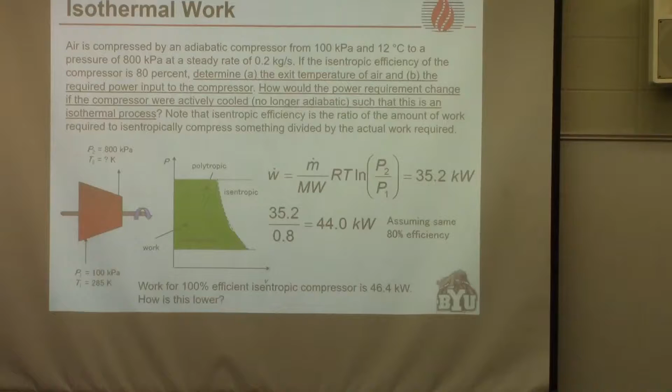Well, at least with the isentropic case, as you compress it, it's heating up, and so the gas is going to push more against the work you're doing. So if you do more work, then you compress it down.

Outstanding answer, right? So as you go through a compression, as you compress the gas, the temperature rises, which means each stage of the compressor has to compress more. Remember, we just said it's the volumetric flow that determines how much work you have to do. So as the temperature rises, the volume you have to compress is increasing and increasing.

And so it does more and more work as it does the compression. So why is it that there are essentially no isothermal compressors used in industry? Real gases don't compress without increasing temperature. Okay, but real gases will increase their temperature too. So over the pressure ratios that most compressors operate, you could use an ideal gas expression for the gas and you'd be fine. That's a good thought.

So real gases, we'll take a tangential question. Is a real gas going to be typically harder or easier to compress than an ideal gas? Depends on the gas, but almost always easier.

It turns out all gases have attractions to one another, right, gas molecules. Ideal gases don't have any. All real gases have some attraction to one another. That's why, remember, in the real gas equations, the correction that they put in there is always a negative correction.

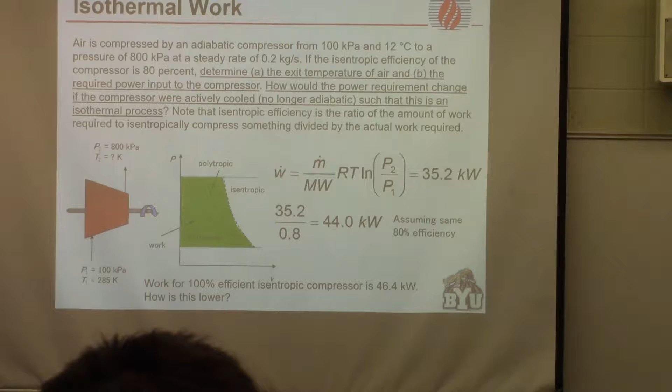So that's trying to get closer to isothermal. It's a bunch of little steps. It's not really flat, but in the limit of an infinite number of stages, you have an isothermal compressor.

You see a question? Well, I was going to ask if we could go back to the slide with all the efficiencies on it. For the last question, we were supposed to find the rate of consumption of fuel. I was wondering if you could point out what I did wrong. So W dot, I said was the horsepower. That's right. And then this is the heat of combustion, I threw in the BTU per gallon.

And the efficiency, and the M dot I was solving for was what I thought was the gas being consumed. Yeah, that is right, that should be what you got. You should have gotten gasoline consumption in gallons per second or something like that. So why do you think you did something wrong?

All right, so is everybody comfortable with all of that? So the important concepts here are for turbo machinery in general, compressors and turbines, the most common for gases, it's really the volumetric flow rate that you need to think about. So this would be a great conceptual question on an exam.

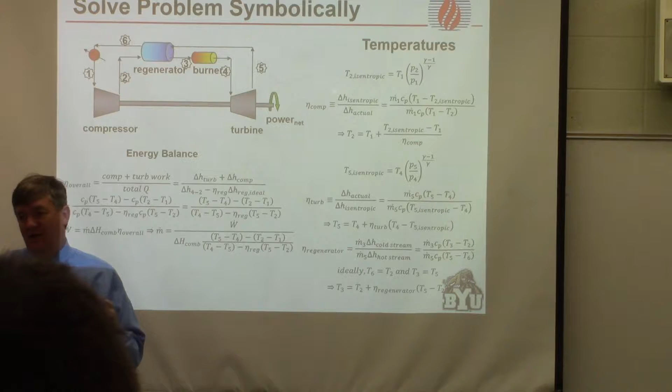If I were to compare argon and helium, which have a molecular weight different by about a factor of 10, and I put argon and helium through the same turbine, which one is going to generate the most work, assuming the pressure ratio is the same and assuming the volumetric flow rates are the same? Which one produces the most work?

They're the same, right? But which one has the highest mass flow rate? Argon has 10 times higher mass flow rate, but produces the same amount of work.

Then if we study hydroturbines, we'll come back to the mercury versus water turbines.

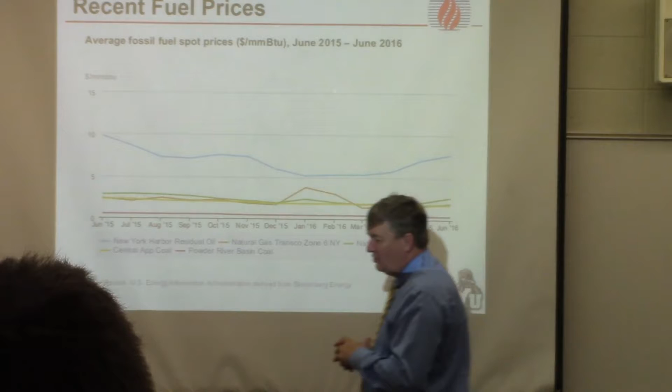Most of you are probably aware that in the United States we have closed, we are building some nuclear power plants, but we've closed more than we're building. We're shutting them down faster than we're building them, actually. Coal is also in decline, and most people blame global warming. Maybe you think that global warming is why coal is being decreased, and I'm not sure anybody knows why we're closing nuclear power plants. But what I want to point out to you is that in the future that could very well be the case.

So global warming may be a major reason that we shy away from coal in the future. But currently it's not. If there were no global warming and nobody were worried about it, we still would be closing coal-fired power plants. This slide shows you that both coal and nuclear would be closed down. The reason they're closing down right now is just 100% economic business decision. It's not because of any bias against coal or anything else.

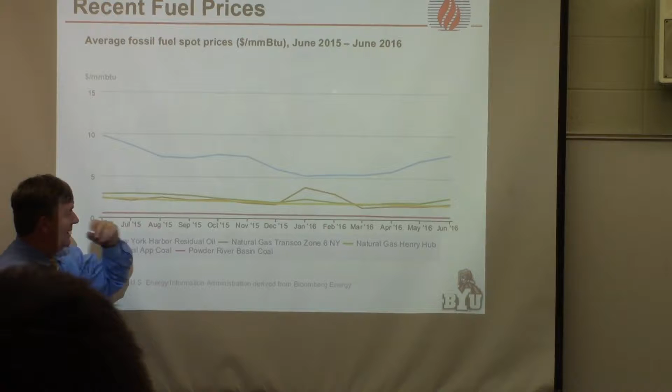This shows residual fuel oil that some people still use for power generation, and this is the cost, the dollars per million BTU, for a variety of different fuels: natural gas and coal, and oil, but ignore the oil right now. Natural gas used to cost more than coal, but a natural gas power plant is cheaper to build. So you would say, well, the power plant is cheaper, but the gas is more expensive. Most people opted for coal because over the long run, the coal was cheaper.

Coal comes in several varieties, we'll talk about that next week. But the kind of coal that we burn in the western United States is typified by Powder River Basin coal, which comes out of the state of Wyoming. Wyoming, by the way, supplies half of the coal that we consume in all of the United States. So that's really cheap coal.

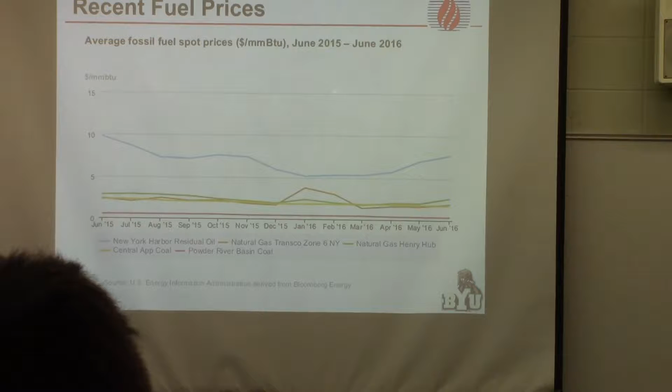It's easy to mine. At the mine, it costs about $3, sometimes a little less than $3 per ton. So think about that for a minute. A ton of dirt would cost significantly more than $3, right? So the idea that you can buy a ton of anything for $3 is a pretty astoundingly low price. And of course, if you buy it 100 pounds at a time, it doesn't cost $3 a ton. But when you buy it many tens of thousands of tons at a time, at the mine, it costs $3 a ton. By the time it gets to the power plant, you have to pay to rail it there, and it's up to $19 or $20 a ton.

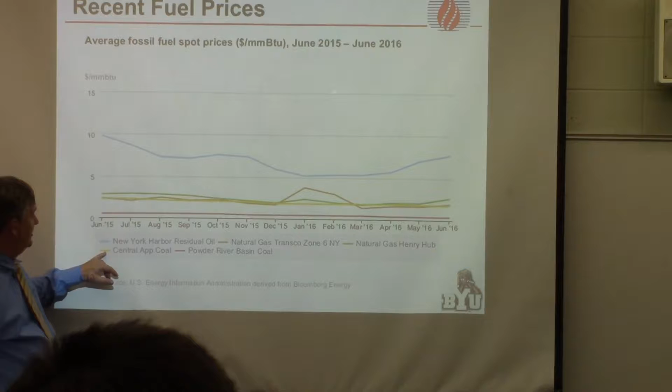So that's really, really cheap coal, and it's still the cheapest source of energy that we have. You can see that one here. But the coals that we mine in the eastern United States, the Central Appalachian coals, are this yellow line, and they're considerably more expensive. The Wyoming coals are typically open pit mined. There may be 30 to 70 feet of dirt you have to scrape off the top, and then you just load up coal in the biggest buckets that they can build and put on things, and they're big.

They have one big scoop that will just scoop up 25 tons of coal at a time, and they dump it in the back of one truck that can carry 25 tons of coal at a time. Or sometimes they just put a drag line that just transports it right out of there. One person picks up 25 tons of coal and does that every 3 or 4 minutes, just pulling it out of the mine. So that's really cheap to mine that way.

By contrast, there are underground mines, which we have in Utah and in most of the eastern United States. So now you have to dig way underground and have a relatively thin coal seam by comparison. And you have to prop up the mountain on top of you as you're digging through this coal seam.

And you're dealing with a bunch of labor unions that increase costs significantly, so that's way more expensive coal to mine. You can see where, that's why it's up here in terms of, it actually has more energy per unit mass than the coal we mine from Wyoming, but it's way more expensive to mine. And recently, these are all recent prices, natural gas is as cheap, or in some cases cheaper, than at least the eastern coals.

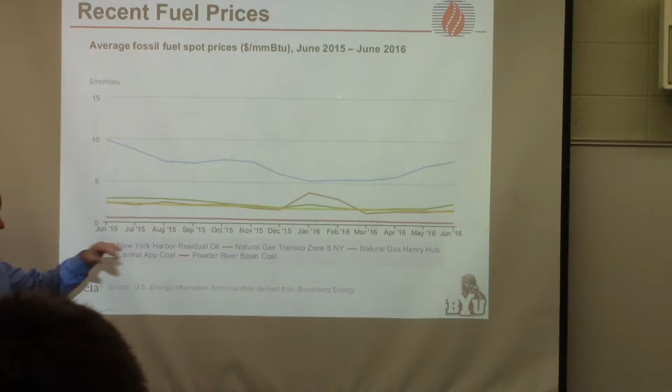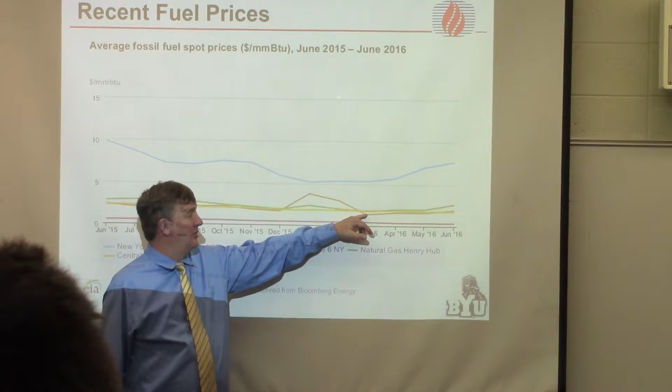So when you're in that condition, this is less polluting, the power plant is cheaper and faster to build, it responds more rapidly to changes on the grid. There's actually no reason other than cost. Cost used to be the only reason you used to burn coal. This used to be 10 times higher, so this was up to here, but now it's down here so low that people say, why would anybody build a coal plant, especially one that burns eastern coal?

And that's the reason the coal mines are being shut down. Nuclear plants cost even more than coal, so the fuel for the nuclear plant is close to zero cost, but the levelized cost is even higher than a coal-fired power plant. That's the reason nuclear plants are so hard to get people excited about right now: you can generate the same amount of energy at a much lower cost, with a simpler and cheaper plant, tying up a lot less capital, if you do it with natural gas.

Now, looking to the future, that could all change, and things like global warming and other factors can change it.

So Greg talked about, and I'll review a few parts of this, how you produce natural gas in some of the properties. He didn't talk too much about how you use natural gas, so I wanted to talk about that.

Natural gas is used primarily in two different ways. What we call a simple cycle turbine, or some people just call this a combustion turbine. This is a typical example of one for power generation. They have a big air inlet on the front, and they don't show it, but there's a bunch of filters here.

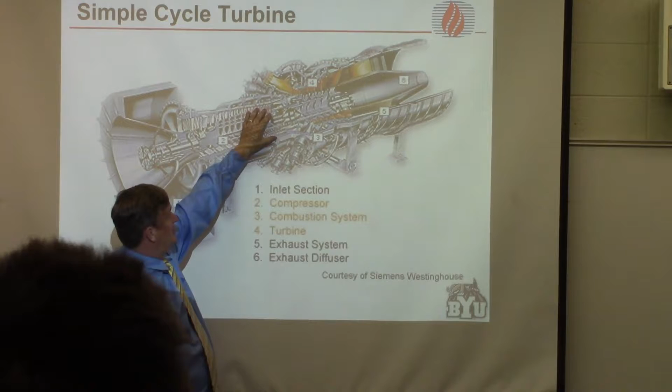They want to get the air as dry and as clean as it can be, get all the particles out of it. So right up front there's a bunch of big air filters and some dryers to dry it out a little bit. Then they pull the air through the compressor, and just like we talked about so far, the compressor comes through here, and then they have these combustion cans all the way around here. We'll see an actual picture of them in just a minute.

So the air at this point is compressed. It goes through these combustion cans, and it burns, and then it goes through the turbine, and it expands, it comes out the back end of the turbine. But it leaves the turbine still at a pretty high temperature. The pressure has already dropped to atmospheric pressure, so you can't expand it anymore to cool it down, but the temperature is still pretty high.

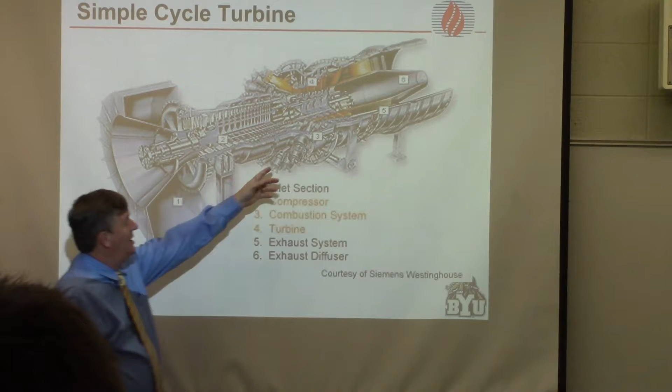So what would be the obvious thing to do to get more energy out of the system? Heat exchange the exhaust. If I set up a heat exchanger back here, and use this high temperature gas to boil water, for example, to make steam, and then drive a steam turbine with that steam, then first of all, what's this cycle called? Do you remember the names of the cycles? Brayton cycle. This is called the Brayton cycle, the gas turbine cycle, the compression.

And this one we haven't talked about yet, but the steam cycle is called the Rankine cycle. I think that might be the only one you studied in thermodynamics class. Does that sound familiar, the Rankine steam cycle? So we come out of the back end of the gas turbine here, and then we build another cycle, the Rankine cycle, where we heat up steam, superheat the steam actually. Steam goes through a steam turbine and it recirculates here. We use the high temperature from the exhaust of the gas here to drive the steam turbine.

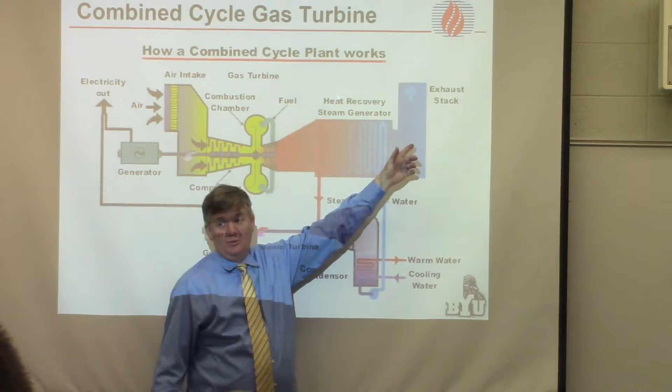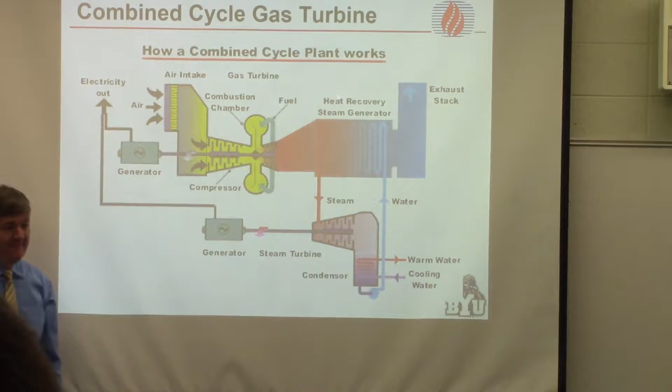And then the air that came through the combustor is back down to room temperature, and we've extracted just about all the energy we can from it. That's called a combined cycle plant—combined cycle meaning a Brayton cycle plus a Rankine cycle.

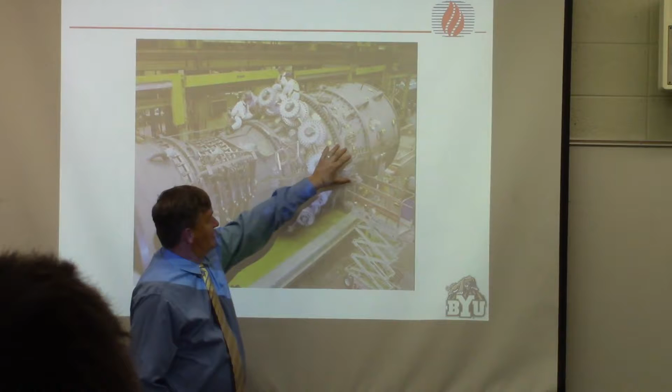This is the front end of that. This is GE's frame H-class gas turbine, shown with people for scale. These are the little combustion cans where the combustion happens, this is the compressor, and this is the turbine expansion system on the back end.

The turn down ratio is an important number to think about—what's the ratio between the maximum power we can produce and the minimum power we can produce that's not zero, where we're still operating reliably and sustainably. You get about a factor of 3 on the turn down ratio for the simple cycle plant.

The startup time for this simple cycle plant is about 23 minutes from a cold start. But if it's in a peaking mode where you're just following the load, it takes about 12 minutes to change the load—you can go from 30% to 100% output in about 12 minutes. That's quite fast and a really important parameter.

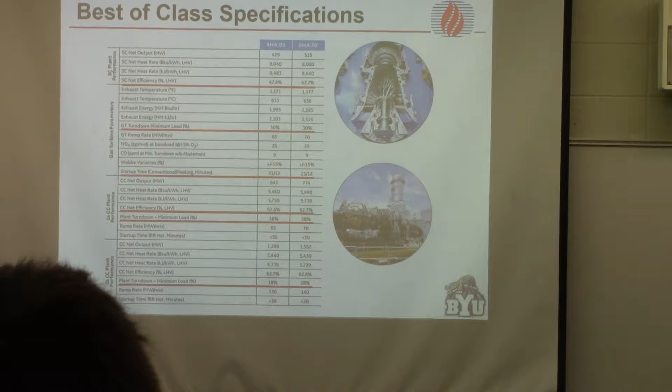So that's the way we use these technologies. A bunch of this is what Greg talked about last time.

This is significant—natural gas is becoming a larger and larger fraction of our total fuel use, especially natural gas production. This is conventional natural gas production, which is actually a small fraction of what we produce now. This is the shale gas and tight gas we talked about last time, and they're dominating production and will for the foreseeable future.

Has that prediction changed since the price of oil fell? The most recent numbers are the prediction.

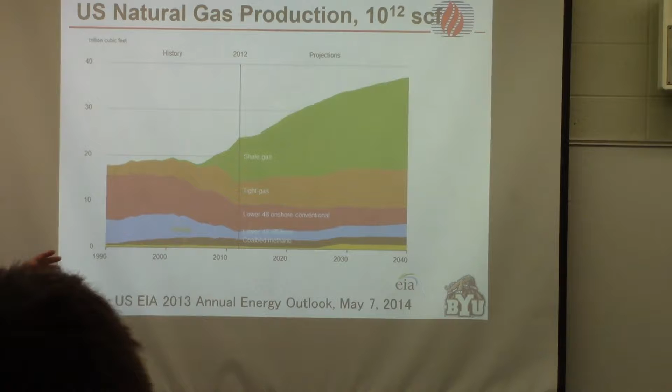Probably, I don't know, I don't think it has. I actually had the more recent data on the first day of class that we went through, and it's on there. I don't think it's changed appreciably.

But you can see how the production has increased. Greg mentioned that people have been fracking for generations, fracking natural gas wells forever, but they haven't been fracking them as efficiently, particularly in shale, to produce oil, liquid oils like they have in the past.

So there's some kind of new fracking technology where they... we got some slides on what fracking is here, and we'll talk about it in just a minute, but that's what's mainly responsible for this big surge in natural gas.

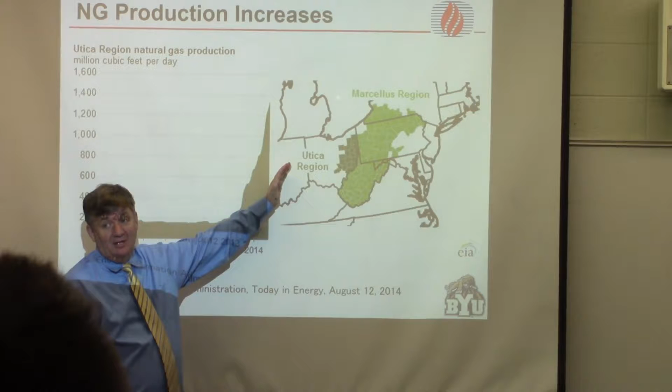And really what's responsible for it is that people are going into the shale deposits, fracking the shale deposits. Mostly they want to get the natural gas liquids out, which are the propane, butane, and heavier materials in the natural gas. Those are the valuable things. That's where they make all their money.

Most of these places are at best breaking even, or probably losing money on the natural gas itself. But natural gas liquids have been valuable. Not as valuable now as they used to be.

Just to give an idea of how valuable they used to be: I think today oil is $44 a barrel or something like that. It was over $100 a barrel just a year and a half ago. So that difference from 44 to 100 would all have been profit when they were doing this.

So that's why there was such a big surge. But people are still operating. We haven't appreciably decreased, even in the most recent data - the amount of natural gas we're producing hasn't appreciably decreased. The profits have decreased dramatically.

So, you talked about how gas wells decay very quickly. Is there like a peak gas, or are we ever going to use it all up? So that's a good question.

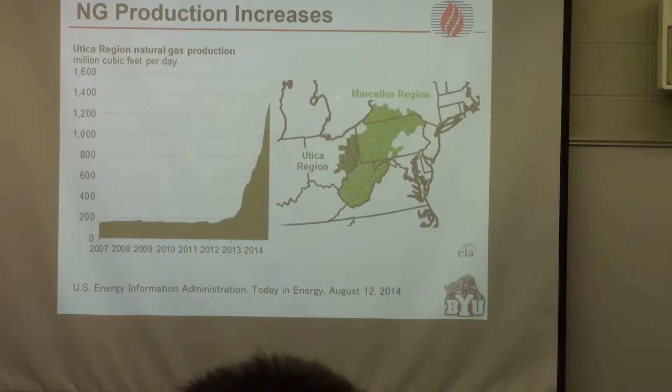Now that they're extracting all this gas out of shale, most people think - there was just an announcement in the news, I don't read the news all the time, but I did when I was in undergraduate school - they just announced a major new shale find in West Texas that increases our total reserves in the United States by 15%. Huge new shale play, and one company announced that they bought the property.

You never know if it's to their advantage to get a bunch of people who are really excited and buy stock. Sometimes these things are a little overblown when they get announced, but nevertheless, we're finding a lot of shale, and there's every reason to believe there's a huge amount left.

So clearly all fossil fuels have a finite life, but with respect to coal, natural gas, and oil, we will probably stop using them for reasons other than running out of the resource. That may be true now with petroleum, since we're doing fracking as well, but certainly wasn't the case in the past - there was genuine concern we were going to run out of petroleum before we found another technology.

So this is in the Utica region - this is where they're producing natural gas. This is the region where, if you saw, you can go on YouTube and see people lighting their tap water - they put a match next to it and it catches on fire.

So the EPA has never been able to reproduce those results, but they're still widely cited.

So this is the Marcellus region - similar kind of big surge in natural gas production. Greg went through most of this.

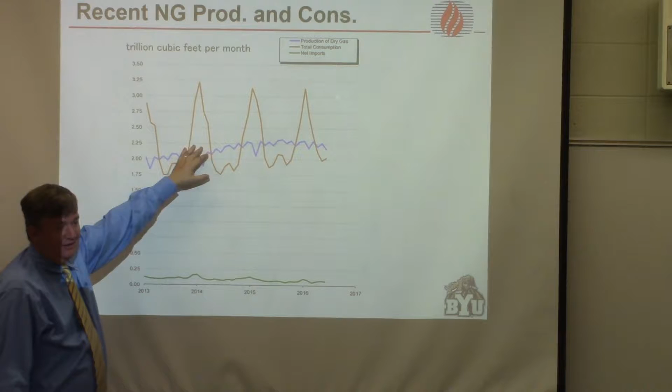I did get the most recent data I could find, and you can see natural gas production has leveled off, but it's not declining like you would expect it might. It might start to decline, and arguably it is just barely starting to decline here. It's hard to know, but it's not.

So far, the low costs have not driven a bunch of people out of business, although money is definitely tight. So we talked about the composition - mostly methane, but it has a bunch of other things in it.

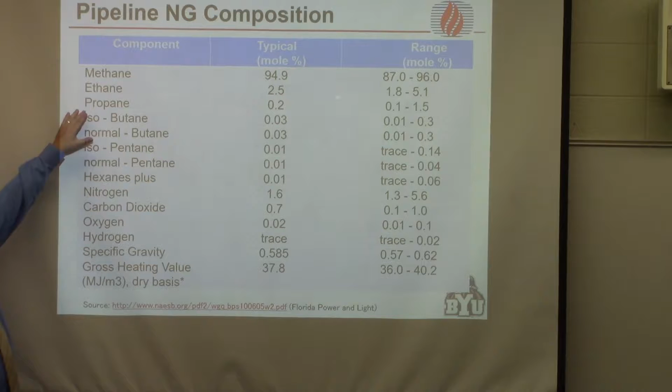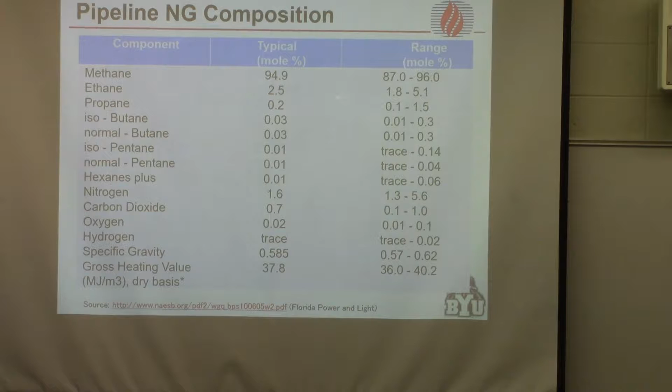What Greg didn't talk about too much is the pipeline specifications. This is not natural gas as it comes out of the ground. What he spent most of his previous career doing was turning this into something meeting pipeline specs: get the CO2 content down to less than 2% typically, get rid of inerts like nitrogen, and there should be virtually no oxygen, no sulfur compounds. They extract almost all of the heavier components, the ethane is debatable whether they put that into natural gas or not, but everything else is way more valuable as a liquid transportation fuel than it is as a gas fuel. They don't want it to condense anyway.

So there is also liquefied natural gas, and this is just asking to be confused. There's LNG, liquefied natural gas, and NGL, natural gas liquids. They're both liquids and they both come from natural gas, but LNG is methane that's been liquefied so you can ship it long distances. NGL is things heavier than methane, either ethane and everything heavier or everything heavier than ethane, which you extract from natural gas and eventually ends up in somebody's gas tank somewhere. So these are C2 or 3 plus, and this is just regular natural gas.

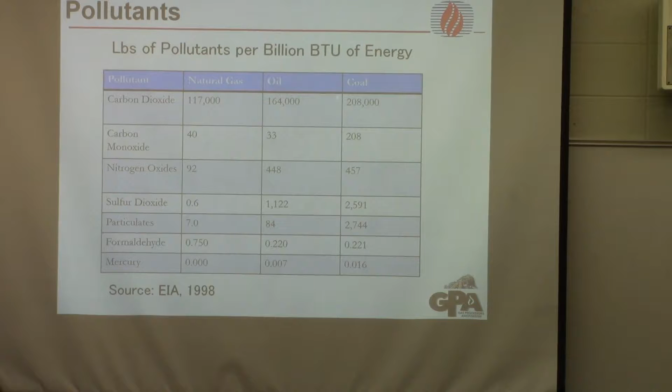The specifications for LNG are richer in methane than the specifications for natural gas, and in particular they're much lower in pollutants. They'll tolerate up to 2% CO2 in natural gas in pipelines, but for liquefied natural gas, the CO2 content specification is 50 parts per million. It turns out CO2 is really difficult to remove — that's the most difficult step of processing natural gas, because CO2 and ethane form an azeotrope, and it's hard to get the CO2 out and leave the ethane in with most processes. So we went through the pollutants.

For natural gas to get the price up, what's going to be the big factor? Is it going to be a decrease in our reserves, or an increase in demand? What's going to bring the natural gas price up? People who answer that question mostly sit in tall office buildings in big cities and get paid huge amounts of money. The honest answer is they don't know the answer to it any better than you and I do.

But here are some considerations. We are shifting quite significantly toward natural gas for power production, which is a large consumption of natural gas. Because the cost of oil is low, the profit margins for natural gas are really low. So it's a very logical conclusion that several natural gas suppliers are going to go out of business because they can't continue. Many have been operating at a loss for a while — companies operate at a loss fairly frequently, because it's many times cheaper to operate at a loss than to actually close down. Airlines do this all the time: they go a year without making a profit, then the next year make an unbelievable profit. Over time they do all right, but in any given instant companies may be operating at a loss. Several natural gas companies right now are probably operating at a loss.

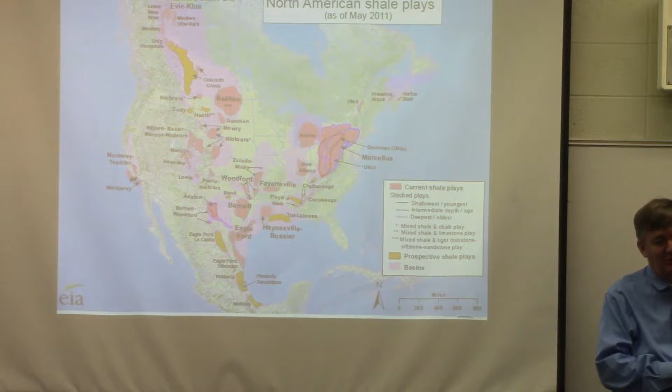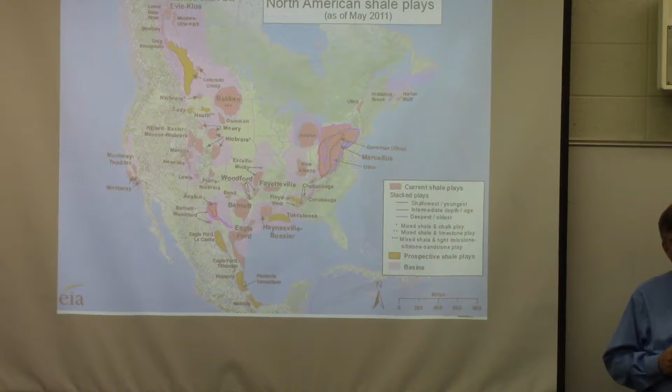So if energy prices stay where they are — remember the slide we saw on the first day, they're actually still higher than the historical average, just low compared to relatively recent history — if they stay where they are, and there's a lot of reason to believe they will, then probably several companies will go out of business. Demand is increasing, but supply will decrease, and that will drive the price up. But people have been predicting that for a long time. One sure way to embarrass yourself is to try to predict anything about what's going to happen in any aspect of energy more than a year ahead of time.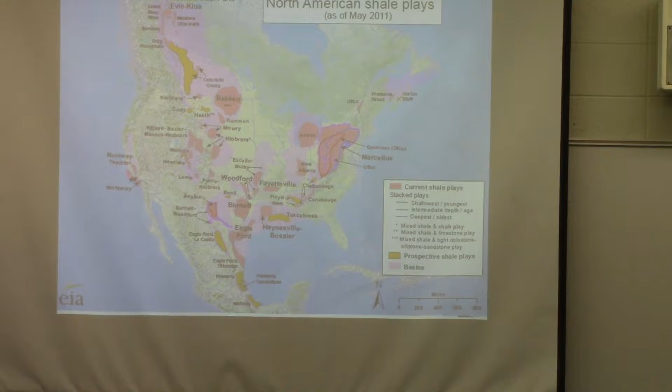So these are where the natural gas shale plays are, where we're getting most of our natural gas right now. This new Alpine one is right in this spot. But you can see there's natural gas in a lot of parts of the United States. Let's talk about how you produce it.

This might be interesting to you.

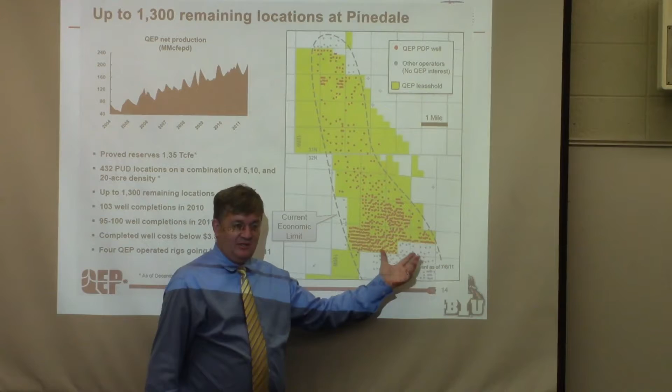So this is actually in Wyoming near Pinedale, but in the Uinta Basin, and I have that slide in here as well. This is just a map of natural gas wells, and this is 1 mile by 1 mile. Look at the number of wells there. You could relatively easily walk around that, look at the density of wells they have in natural gas plays. There's lots and lots of natural gas plays, and the Uinta Basin looks even more dense than that in terms of how many natural gas wells have been drilled.

Wouldn't it be more efficient to frack those wells instead of putting them that close to each other? So they do still frack them - directional drilling, horizontal drilling. They're doing that more and more, and that's increasing fairly significantly, but it is still expensive.

The directional drilling costs quite a bit more than others, but in shale plays in particular - these aren't traditional natural gas deposits - shale plays, they almost always frack it. So let's see what fracking is.

With a normal oil rig or whatever, it has the arm that pumps up and down. Is that the same for a natural gas well? No, these are gases, so they'll usually come out of the ground - you try to control the pressure down, so you almost never have to pump them out. You pump them across the ground, compress it, pump it into pipelines on the ground, but getting it out of the ground is not one of the problems.

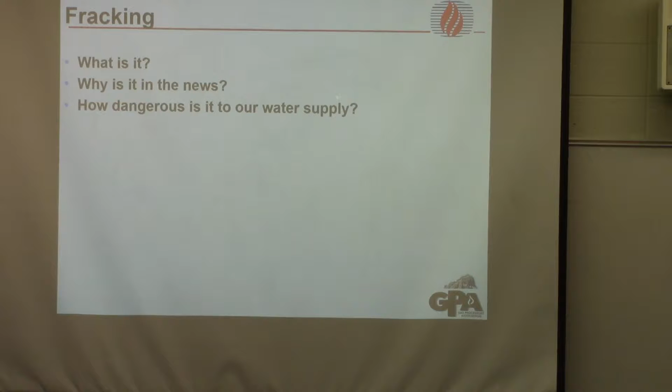Because think about it, the pressure in the reservoir is basically the pressure the water would be at that depth, and natural gas wells are approximately the same depth as oil wells, about a mile underground. So there's a lot of pressure, and the weight of the gas in the pipe is small. So once you get in there and it starts producing natural gas, it's not hard to get back out.

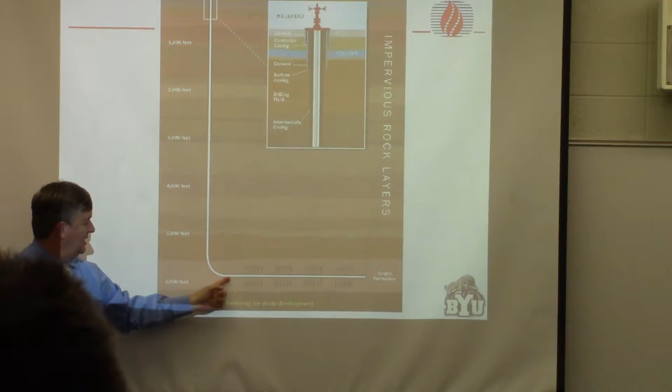So fracking - let's talk about what fracking is. As always, these are never to scale. So this is a mile, and this is 2 feet this way. You come and drill down here, and they don't turn this rapidly either - they come down in kind of a long, gentle sweep. But eventually you can get these wells to be horizontal.

This is shale, for example, some formation you're trying to produce. You drill through here, initially just drilling until you're at the end of the formation, or until you're to the point where you're going to extract the rest of it from another well and from another direction. Once you've completed the well, you send a little device down here that explodes and perforates the pipe that you put in here, and then you pressurize.

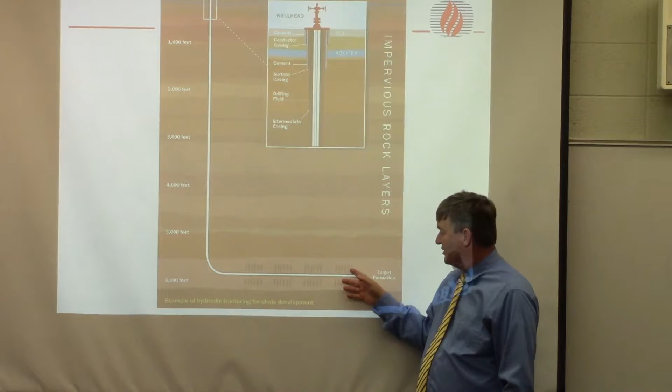You do this one at a time, not all at the same time. And then sand - traditionally it's been water with sand in it. The sand is coated with what they call proppant, which is usually sand that's been coated with hydrocarbons or other things to make it easier to pump, because sand has sharp edges and makes it abrasive when you pump it through. If you make it more spherical and round, it's a lot easier to pump, and it helps with both its strength and its resistance to the materials it's going to encounter down there.

So you pump this slurry of sand and water into the formation at very high pressure, and it fractures it. Think of this as sandstone with a bunch of gas and oil trapped in it, and you fracture the formation. They've been doing this for a long time, but in the past what they've done is just fracture it and then pull the gas out. If all you're doing is pulling gas out, that works fairly effectively.

But if you're trying to get the liquids out as well, as soon as you let the pressure off of it, all those rocks kind of settle back into where they were before, and they seal themselves up again, and you can't get the liquids out very effectively.

So the new thing in fracking is these proppants that you put into the liquid - they get into wedges between all of these rocks, and you pull the liquid out, but the little sand particles stay there, so now the rocks can't collapse back into their original formation. Now you have this big fractured formation, and you can pull out gas and the liquids. At the temperatures that exist down here, these are all usually supercritical or liquid or gas-like substances, but you're pulling them out at a relatively high temperature and producing the natural gas.

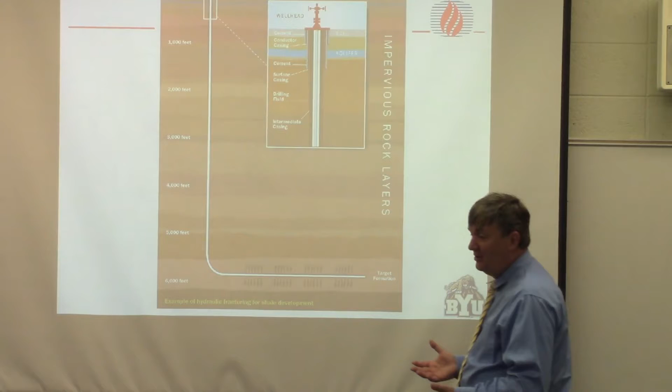So we used to recover maybe 15, at best 20% of the hydrocarbons from a formation like this. Actually, if it was tight sandstone like shale, probably more like 3 to 5%. And now people are getting recoveries up into the 60% range of these same materials. So materials that used to be wells that people drilled a long time ago and decided were dry are now potentially useful again for extracting hydrocarbons, and you can much more effectively extract these things.

So once you finish this one and you seal this off, you do the same thing, and you just keep marching back here until the whole formation is fractured and you produce the whole formation.

So the very most recent thing that people are doing is using carbon dioxide instead of water with the proppants to do the same thing. Carbon dioxide has the advantage that almost all of the hydrocarbons will absorb it. So the carbon dioxide dissolves in the oil and makes it less viscous, so it flows out of the formation easier than if you use water to do the fracking.

I don't know if everybody's going to start doing that or not, but a number of people have done that successfully in the recent past.

You're saying you use carbon dioxide instead, wouldn't it be a lot different, because carbon dioxide is a gas versus a liquid? How does that work?

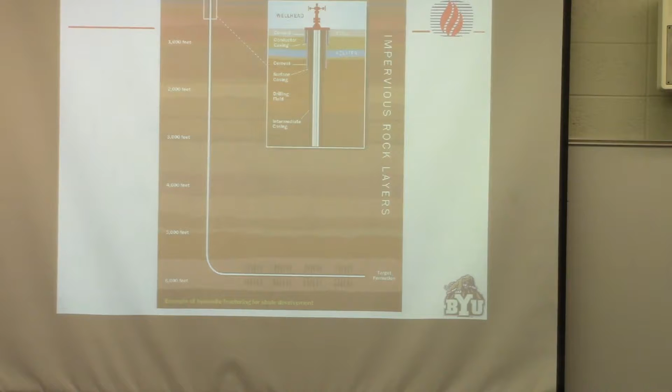So the pressure of the formation is typically 200 to 400 bar. And then when they're doing the fracturing, you're up to 600, maybe 700 bar. So it's condensed, really dense. At those pressures, depending on the temperature of the formation, CO2 will actually be more dense than water, even though it's still technically a gas or a supercritical fluid.

Will that also help you save on separation costs, getting the water out? Yeah, and so when you pull it back out again, the CO2... well, it saves and not saves.

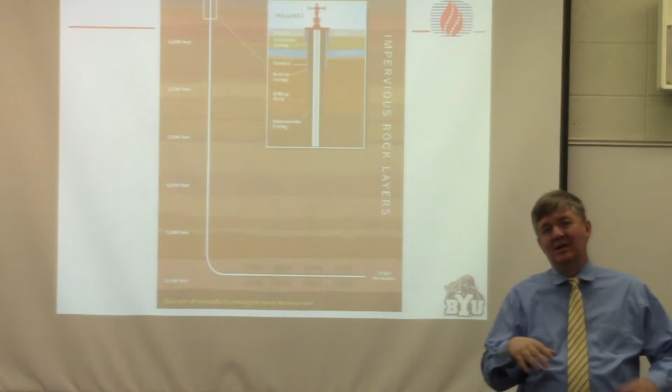So people are increasingly going to be required to make sure they recover all of the CO2. They want to anyway, because the CO2 is pretty expensive. To buy CO2 for an operation like this typically costs $80 a ton. I'll put that in perspective: remember, coal and oil was $3 a ton.

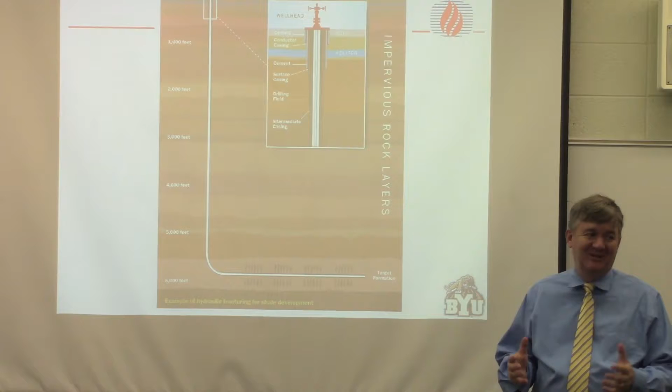So you don't want to just vent it into the atmosphere, but because of climate change issues, they don't want to vent it either. So that's the fracking operation.

Amine treating removes CO2. Then you dry it back out again, remove whatever mercury there is. This just goes through some typically aluminum-based mole sieves, or activated carbon. Then you try to get rid of the nitrogen.

This is where you start going through a cryogenic process, and then you recover the natural gas liquids. So this is where you cool it down to maybe negative 120 to 140 Celsius, and condense all of the natural gas liquids you can. You sell those.

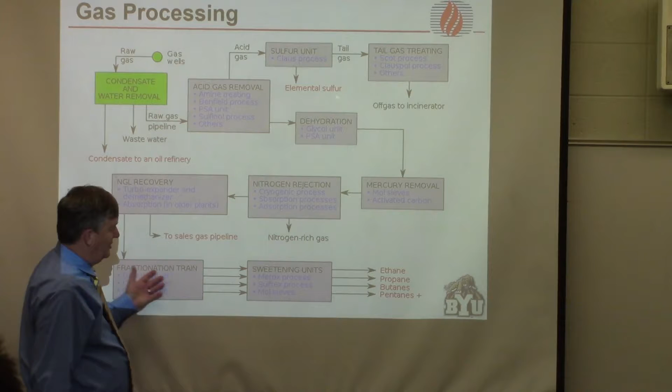The liquids come out down here. This is where the natural gas goes, out to the pipeline, and then the liquids you sell to a power plant or to a refinery, and they refine them. So that's a classical chemical engineering kind of process.

So you did some homework about the critical point, and I don't think we talked about the cricondenbar, but this is a little counterintuitive. For a pure substance, this doesn't ever happen: the critical point on a pure substance is always at the maximum temperature and pressure at which you can get two phases. So there's no part of this curve above that point—it kind of comes up and goes back like this.

But for mixtures of substances, you can, and almost always do in the case of natural gas, get to a point where you can have a gas and you can decrease the pressure of the gas and form a liquid.

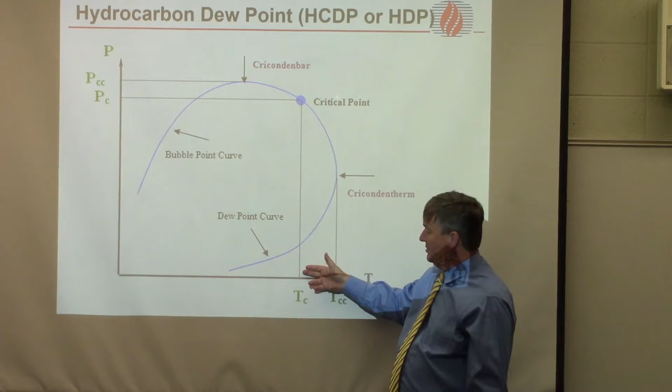As long as the temperature stays constant, usually if you decrease the pressure, you think you're going to create more gas. If you have a liquid, you would vaporize it. But in this case, as you decrease the pressure, it might form a liquid, and then you continue decreasing the pressure, and it goes back to all gas again. So there's a lot of things where your intuition about thermodynamics, when it meets the real world, turns out to be wrong. You find out, I thought I understood thermo, and now I don't. This is maybe one of them.

Another example is the CO2 content you get in exhaust gases. You would think that if you have a mixture of, say, 15% CO2 and 85% nitrogen, there ought to be some temperature or pressure where you can turn that CO2 into a liquid, because everything can be turned into a liquid, gas, or solid at some pressure. But with mixtures, that's not necessarily the case. So in those mixtures, there is no pressure or temperature at which the CO2 will be liquid. It's going to be a solid or a gas. You can't turn it into a liquid. The real world brings you a lot of thermodynamics that aren't so obvious.

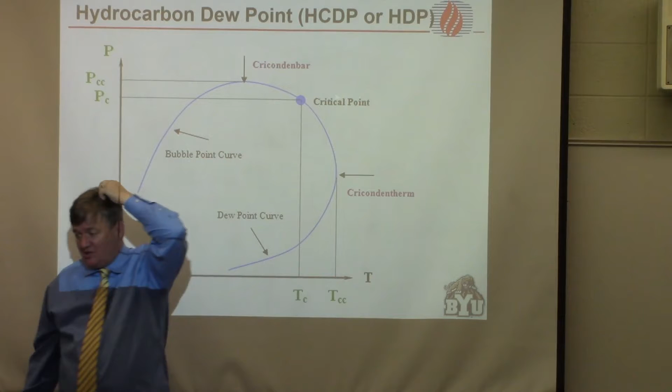The reason this is such a big issue is that it's one of the important specifications for natural gas. If you pump natural gas into a pipeline, pipelines go up and down over mountain ranges and travel long distances. So if you start off here but go up a mountain, the pressure starts to drop because of the rise, and then you start condensing liquids. This is a long pipeline, maybe 80 to 100 bar pressure, and it might be a couple hundred miles long. So this liquid starts forming in the pipeline, and of course it's going to run downhill and pool in places, building up to the point where it can actually plug off the pipeline. Then you start getting slugs of liquid going through your pipeline, and a slug of liquid arriving at a processing plant that's expecting gas can do a lot of damage.

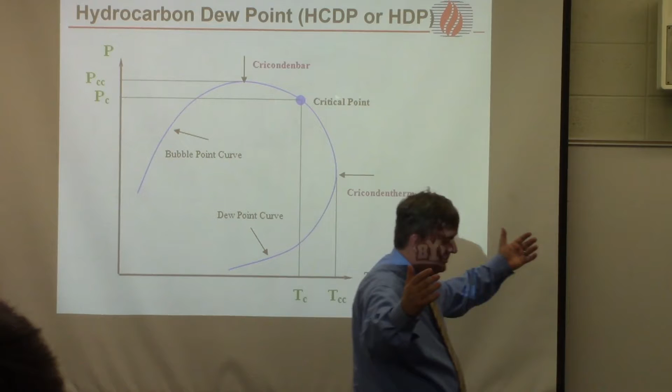There probably isn't anything in our country as potentially dangerous as the interstate natural gas pipeline. Think about this: the pipeline might be, typically, 2 or 3 feet in diameter, as much as 5 feet. They run at 100 to 125 bar pressure and go for 125 miles. If you were a terrorist, for example, and found where one of those went through a major city, and you blow it up, you've got 125 miles of 100 atmosphere combustible gas feeding that flame. That is a very serious safety issue.

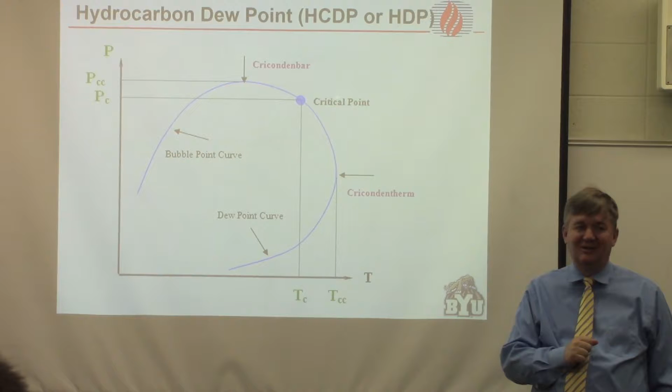Just like everything that stretches over hundreds of miles, it's almost impossible to constantly monitor what's going on. There are gas lines that go under scout camps and other places where people are always present. So for that reason, they put shut-off valves frequently in these pipelines so you can stop the gas flow if there's a major disruption. But compressed gases, even if they're not combustible, are very dangerous, and when they're combustible compressed gases, they're much more dangerous.

Other questions? Yeah, I was just going to say, it would seem like it'd be pretty easy to just have a couple points in your pipe where you put a liquid collection spot. Do they do anything like that?

So they do have places where they collect liquids, but it's not pooling up in one place, it's going to be coating the surface everywhere, and it's potentially corrosive. They make these little devices called pigs that they send down the pipelines, and they're pretty cool actually. Some pipelines are big enough that they actually have a place where a person could ride the pig through the pipeline. Basically it's just a little inspection device that fills up about the entire pipeline and goes scuttling down it, taking pictures to see if the walls are cracking anywhere, if they're corrosive, or if there are places where things have been pooling.

And they'll inspect the pipelines like that every couple of years or so, just for that reason. But they would much rather, and this is typical of industry, just not deal with liquids. So they're just never going to put anything in this pipeline that's going to form liquid. It's a way better solution than trying to go patch the problems when they occur.

So you hear a lot about oil pipelines and how the potential of them leaking gets people freaking out. Do people freak out about natural gas pipelines? They should, they're way more dangerous. Well, the one thing about natural gas is when it does leak, it all goes up in the atmosphere. So it's not quite the environmental hazard that people think of with oil. It's not the water hazard that oil is, for example. But it's a much bigger safety hazard.

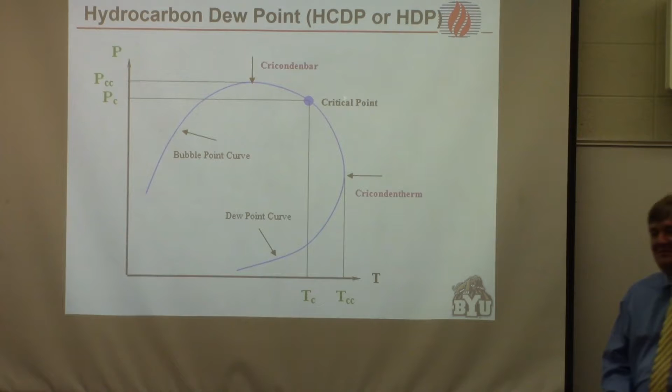Just the potential energy stored in that gas is much higher than an oil leak. An oil leak isn't going to blow. 100 atmosphere pressure would blow the building to rubble if it erupted underneath us. A 100 atmosphere liquid would be a relatively minor incident in the room by comparison. At 100 bar pressure, there's probably easily more than 1,000 times the energy in the gas, just in terms of PV work. That's a good thing to remember.

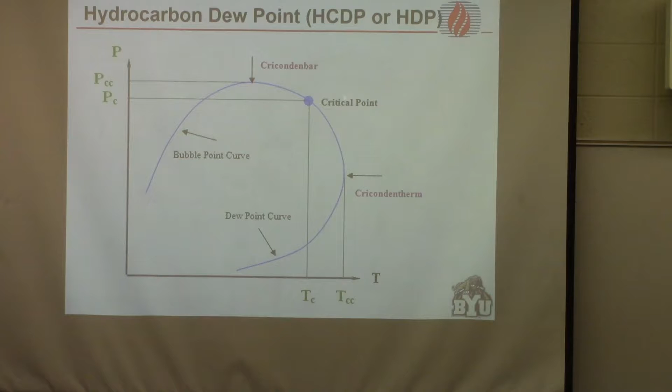Other questions? How about some of those gas lines failing sometimes in the US? Yeah, they do fail for reasons like we're talking about, or just structural reasons. Everything fails at some point. But a catastrophic failure like an explosion is hard to manage. Normally they will fail by some flange starting to leak, and they'll be able to detect the leak and shut it down, or something out of a pumping station will fail.

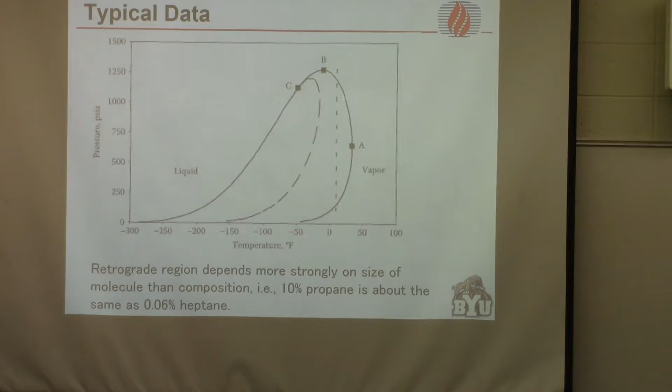So let's see, they call that retrograde condensation. This would be great if you're going to work in the energy industry, you can use something like this. The existence of this retrograde region is strongly dependent on the size of the molecule, not so much on the composition. So about 10% propane in methane produces a retrograde region that's about the same size as 0.06% heptane in methane. A little bit of a big molecule will produce a big retrograde region. A relatively larger amount of a smaller molecule produces the same region. So just think it's not how much C2 and heavier you have, so much as what the molecular size is.

But let me point out that most people say we want to manage this. Turns out this number is completely arbitrary, but there's a goal that most of the world is set up around: we don't want the temperature of the Earth to change by more than 2 degrees. It's already changed by almost 1 degree. To get to the 2-degree goal, that's going to require a global reduction in CO2 emissions of about 60 to 70% compared to 2005 levels of production. In the U.S. they're not that different than they are now. Globally, they're higher now than they were then.

So reducing CO2 emissions by 60 to 70%. All of electrical power production combined accounts for about 33% of total CO2. So we would have to reduce all of electrical power emissions to zero CO2 emission to be about halfway to managing the temperature to 2 degrees. Converting power plants from coal to natural gas is a move in the right direction, but it's not a solution to this problem. These large stationary sources of CO2 are going to be much easier to control than small distributed things like residences, and much easier than mobile sources like automobiles and airplanes. So the real goal, if you're really serious about climate change, is to find a way to get CO2 emissions to zero, not just reduce it by 50%.

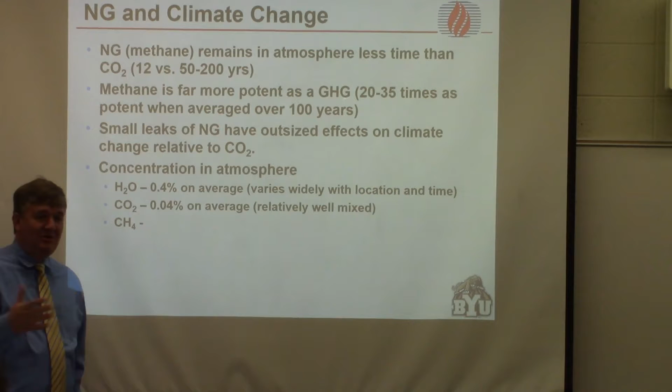The second approach was to just go measure the methane content in the atmosphere and compare it where people are doing natural gas processing to where they're not. So you have a baseline in terms of the natural methane content, and then the methane content where they're doing the processing. This gives a much, much larger number in terms of the amount of methane getting into the atmosphere. Since then, people have been redoing the studies, and it seems like the second study is more significant.

So let me just talk briefly about the greenhouse effect, and then we'll take a break. This is the essence of the climate change issue.

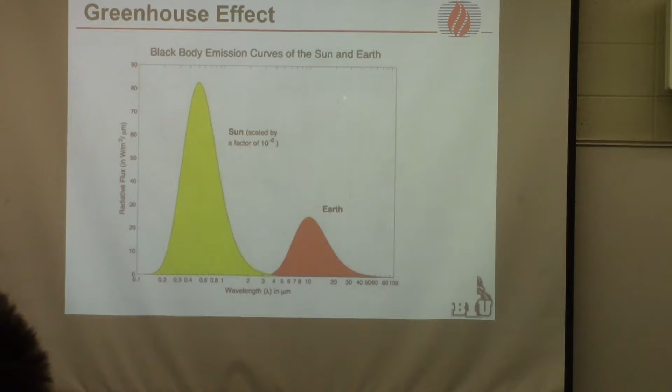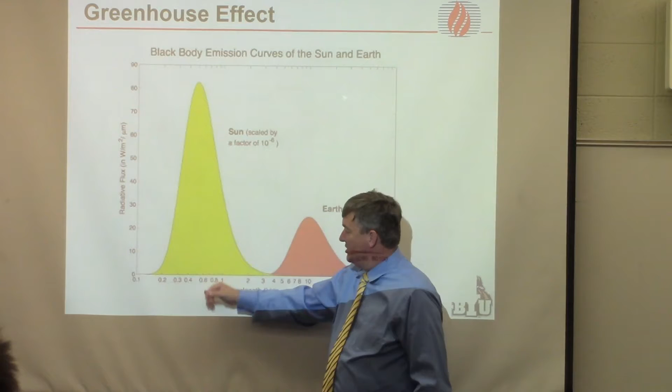When the sun shines at us, it has radiation flux as a function of wavelength that looks like this yellow bar. On Earth, in this bar, there is essentially no absorption of radiation from CO2 or nitrogen or oxygen or methane, or almost anything in the atmosphere. If there was some absorption, the skies would be colored, because it would be selectively absorbing light at one region or another. Just slightly outside of the visible region is water absorption, and there's a lot of absorption into UV, which we're grateful for, because otherwise we'd all be suffering from skin cancer way worse than we are. In the visible region, from about here to about there, where our eyes see, there's virtually no absorption in the atmosphere. There's scattering by particles, but there's no absorption.

But the Earth is pretty warm compared to space, so the Earth re-radiates this radiation back into space. The Earth is cold compared to the sun, so this is the spectrum of the Earth's radiation.

It's clear out in the infrared. Out here, CO2 and water and methane and almost everything else, but not nitrogen and oxygen, absorb radiation. And so some of the radiation that the sun deposits on the Earth is trapped in the atmosphere in what we call the greenhouse gas effect. And we are very glad for that greenhouse gas effect, because if it were zero, the Earth would be much colder than it is now, so cold that the oceans would freeze over, and life as we know it on this planet wouldn't exist.

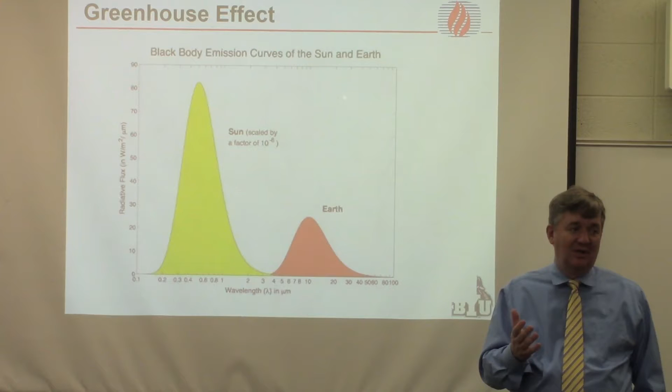Life forms would have to be very different. Even in the tropical regions, it would be way too cold for current life forms to exist. So the problem is, though, that we have increased the historical average concentration of CO2 in the atmosphere. Over the last several thousand years until the last few tens of years, it was about 280 parts per million. We're now at 400 parts per million, and that increase is due almost entirely to the combustion of fossil fuels and dumping CO2 into the atmosphere. And the increase from 280 to 400 parts per million is driving a temperature and climate change that's the essence of what everybody's arguing about.

So the EPA went around and measured leaks at specific places. They found out that about 1.35% of the natural gas leaks into the atmosphere at some point during its processing before it gets to whatever it's going to be at the end. NOAA, the National Oceanic and Atmospheric Administration, measured the CH4 in Utah, among other places, and they estimated leaks that were 10 to 20 times higher than what the EPA measured.

So what they're really calculating is what is the contribution of methane to global climate change. And because these numbers are so far apart, you can get very different answers. But at the high end of these numbers, it's quite significant.

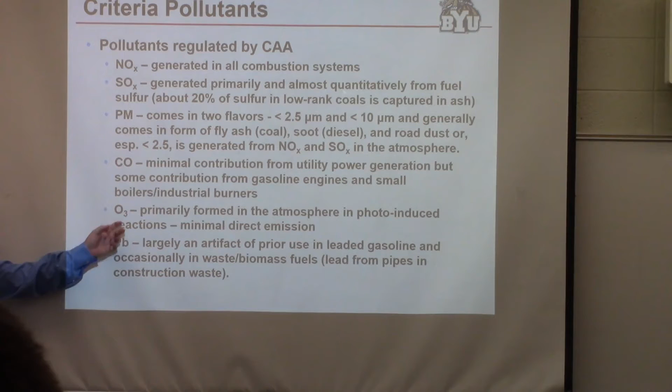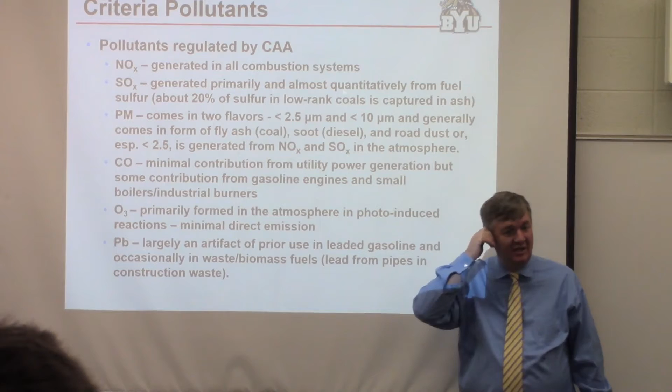And is a major consideration. And then finally lead. Lead has mostly been removed from products - we used to put lead in paint, we used to put lead in gasoline for reasons that we talked about, but we don't do either of those things anymore. So mostly this is old stuff that we're dealing with, but there are some very significant lead regulations in this Clean Air Act as well.

So those are the pollutants that we worry about. There are some other ones - two of them - all of them are now regulated, but only very recently. The regulations for CO2 emissions from power generation were passed last summer, about a year ago this summer, and they came into effect about this time last year. They are being challenged in court, like everybody knew they would be - they've already been challenged in court, but I think everybody expects that some form of those regulations is going to get through the court battle, and we will be looking at CO2 regulations that are pretty severe, actually, that are going to cause major changes in the energy industry.

Mercury regulations passed two years ago. So mercury in the atmosphere - we don't think of mercury as part of our atmosphere, but we're all breathing a little bit of mercury, and depending on whose data you read, a significant fraction - a third to a half - of the mercury in the atmosphere comes from combustion processes. The rest of it is naturally occurring mercury that would be hard to control. But mercury emissions from power plants are now being regulated, and people are controlling mercury emissions.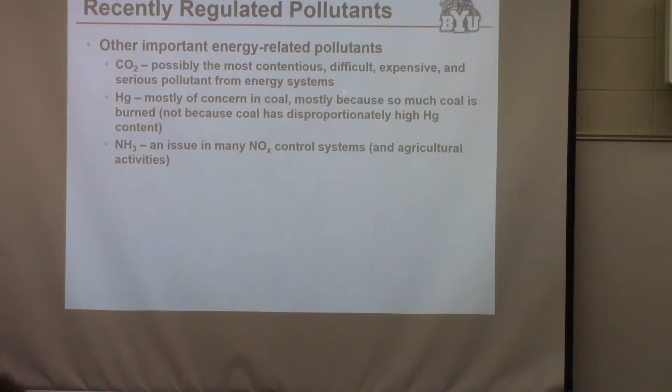And ammonia is another major issue. Ammonia is part of the most effective NOx control systems - you inject ammonia over a catalyst and react it to form N2. Some of that ammonia escapes into the atmosphere, and in regions that are very intensely agriculturally active, like Cache Valley in Utah, for example, ammonia from agricultural operations is also quite a significant emission in the atmosphere. Of all the things we've talked about, it's the only base in the atmosphere - the rest of them form acids, and its reaction with the other acids is a significant contributor to air quality issues in regions where it's emitted.

So let's go through each one of those individually and talk about what's important about them. So, NOx - the literature on NOx chemistry is enormous.

I'm not sure what fraction, but it's quite a large fraction of the research done in energy science has been done to figure out how to reduce NOx emissions from generation. This is probably among the most complex and certainly one of the most important gases we talk about. It's primarily the pollutant in Wasatch Valley responsible for our air quality issues in the wintertime, which are severe.

We have very poor air quality in some winters, most winters. So conceptually, there are three ways you can form NOx. There's thermal NOx, which is most of the NOx that comes out of an automobile engine. This is where the high temperatures generated in the flame are high enough that you form some radicals, mostly OH and some oxygen radicals, and those radicals react with molecular nitrogen and can form NO. That's a process we call thermal NOx, driven by high temperatures and radical concentrations.

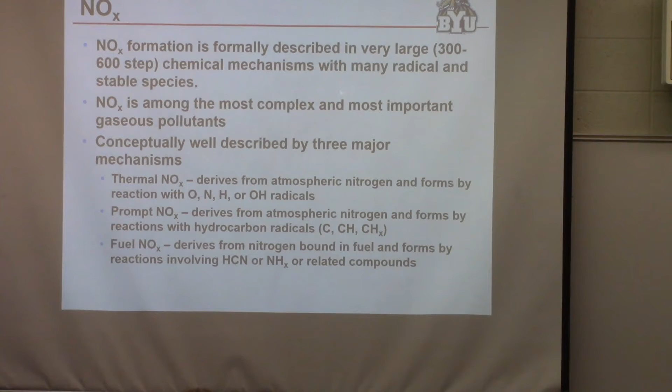In the case of natural gas and petroleum, the nitrogen is more reactive than carbon, so over long periods of time it has reacted and gone into forming molecular nitrogen eventually released into the atmosphere. But in coal, biomass, and black liquor, significant nitrogen remains in the fuel and forms NOx. It usually does so through an HCN intermediate step or an NHx intermediate step, eventually forming NO. Equilibrium NOx is a concept, but NOx is never actually in equilibrium—this is really detailed chemistry that is kinetically limited and very complex.

Just about everything reacts with just about everything at some level. The chemical mechanisms describing NOx formation chemistry in a gas turbine, for example, involve over 300 elemental steps and 70 different reactive compounds. It's a very complex network of chemistry. But equilibrium helps you understand, at least conceptually, some of what happens.

So what happens in a flame is you start off typically with virtually no NO in the gas, and as all these radicals are reacting, the NO is trying to reach its equilibrium point at that high temperature. But then quite rapidly in all these combustion systems, the temperature drops, and more importantly, the radicals go away, and the chemistry stops.

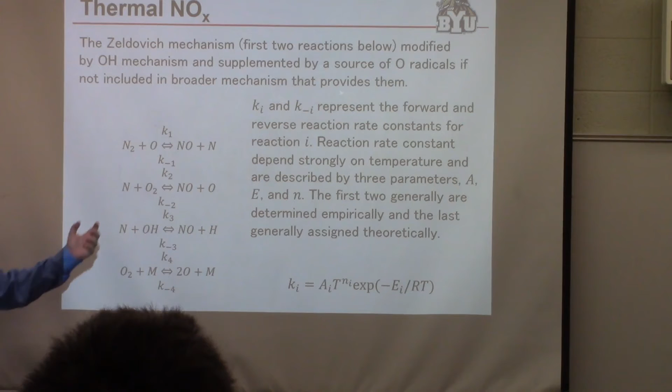So in your homework, one of the things you're going to do is remember your normal chemistry: when we want to write the reaction rate expression in terms of things we can measure, we can't measure nitrogen radical, oxygen radical, or hydrogen radical concentrations. So how do we change this kinetics into something we can measure? That was the whole objective of what we did in kinetics class with the steady state assumptions—to try to eliminate the radical concentrations.

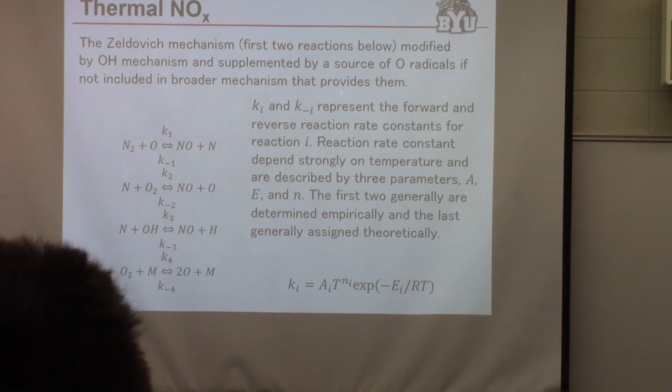So if you make the assumptions—write down the kinetic expression, assuming those are all elementary reactions—for NO, for example, it has all of these components, but it has things like nitrogen and oxygen radicals in it. In order to figure this out, we need to put something in there that we can measure. We do that by writing down the expressions for each one of those radical concentrations, assuming those are zero, and solving using those several expressions. You can solve, for example, for nitrogen radical in terms of things you can measure, like NO and N2 and oxygen, and substitute them all back in to come up with an expression that makes some sense.

This one's more complicated than the one you'll do in your homework. Yours is just two steps, and you do a balance around those radicals and come up with an expression that says the rate of NOx formation should be this, in terms of an expression that doesn't have any radical concentrations in it, because we can't measure those radicals. So everybody comfortable with that?

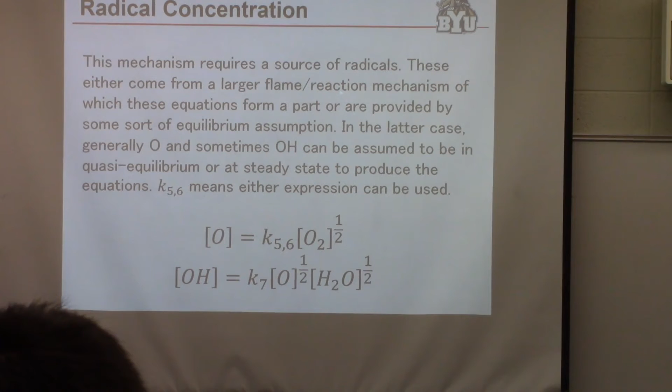So, in the thermal Zeldovich mechanism, these are the parameters that go into those reactions.

Prompt NOx is described by a similar reaction mechanism with radicals that are hydrocarbons—this is called the Fenimore mechanism. Fuel NOx just starts with fuel nitrogen; this is fuel bound into a very complex molecule like coal or biomass. As it thermally dissociates, it forms things we can identify like HCN or NHx, less frequently N or sometimes CN.

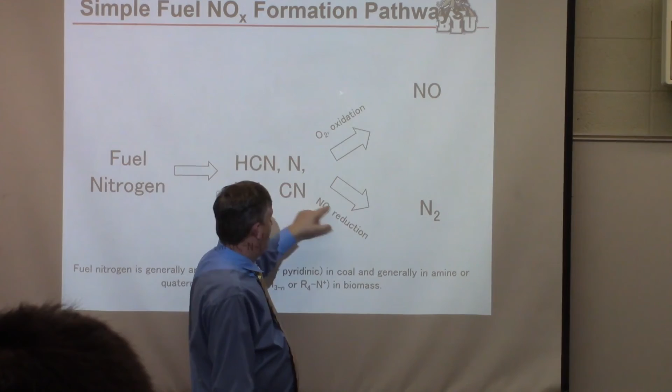And then these react competitively: they react with NO to form molecular nitrogen, and they react with oxygen to form NO, and then that NO reacts with these and forms molecular nitrogen. People can spend a research lifetime looking at the formation of NO through these mechanisms—this is a large part of many people's work in combustion systems.

So SOx, by comparison, is much easier. Fuel-bound sulfur pretty much quantitatively reacts to SO2 in the atmosphere. If you know how much sulfur is in the fuel, you pretty much know how much SO2 you're going to generate in the exhaust. The only exception is that some ashes, particularly calcium-rich fly ashes, the inorganic portion of coals, actually capture SO2 and convert the calcium to calcium sulfate. So usually they'll take 80% of the sulfur in the fuel as a measure of how much sulfur is going to be emitted by the power plant, and you're done.

Books and research articles on NOx would fill this whole building, while those on SOx you could put on this desk. So it's much easier to understand. SOx removal occurs.

SOx is overwhelmingly in the form of SO2 in the flue gas. Usually the SO3 contents are essentially immeasurable, but SO3 is actually the equilibrium form of sulfur. By the time SO3 becomes the equilibrium favored form of sulfur, the radicals are all gone, and there's nothing to help SO2 react to SO3. Even though we write it this way, it doesn't just react with oxygen to form SO3. In the atmosphere, though, it does react to form SO3.

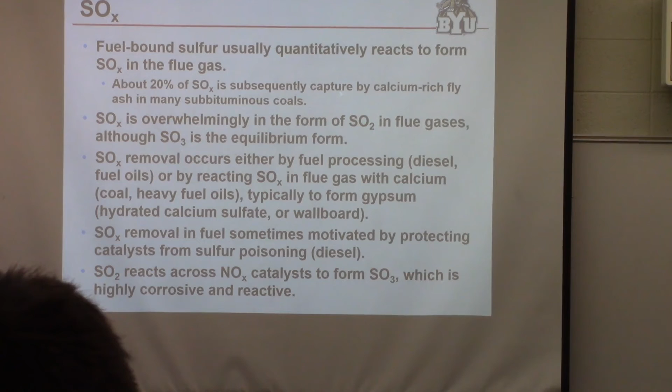SOx removal is done typically by fuel processing. In the case of diesel, they remove the sulfur from the fuel before they put it in your tank. Or by reacting SO2 into flue gas. In the case of solid fuel combustion, they'll inject at the tail end of the combustion process a bunch of typically calcium, and turn calcium oxide into calcium sulfate - that's usually done in a wet process. So they turn it into gypsum, which is the material we use in wallboards and construction. You turn it into a relatively inert, benign compound that can either form into wallboards and sell as a construction product, or as landfill, is stable and no longer reactive in that form.

Sometimes SOx removal is frequently actually motivated by protecting catalysts. SOx is a very common catalyst poison - that's the sulfur in general - so frequently you'll remove sulfur because there's a catalyst somewhere in the process that can't stand the sulfur. And it reacts across NOx catalysts to form SO3, so even though it won't react by itself, the same catalysts they use in power plants to reduce NO concentrations also promote SO2 to SO3. So part of the science of those catalysts is to try to get one of those reactions to occur and not the other. We're getting pretty good at that actually, preventing the SO2 reaction.

So what do they do with the SO2 that's in the fly ash that they filter out? The fly ash itself gets typically landfilled, or the best use of fly ash - and this happens with almost half of the fly ash in the United States right now - is you can actually replace cement.

This is where chemical engineers should become better civil engineers. Concrete is the solid material that you walk on - that's what a sidewalk is made out of. Cement is a powder that goes into making concrete. Cement and water and gravel and sand and fly ash sometimes all get mixed together to make concrete. We use those terms interchangeably a lot, but they really mean different things. Fly ash can actually displace cement - a lot of concretes are made with 20 or 30% fly ash instead of the cement. In the long term, the fly ash actually makes the concrete you produce some better material than it would be without the fly ash in it.

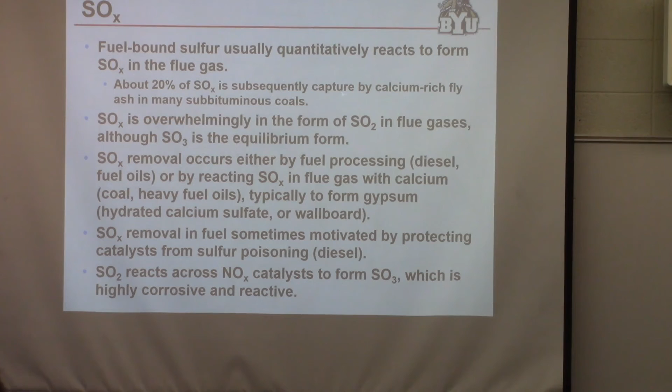So there are other uses for it like that, and a lot of it gets used that way. Some of it just gets buried in landfills. The SO2 in that case is in the form of calcium sulfate, which is the same as the wallboard in your house. It's stable and benign and not a health threat to anyone.

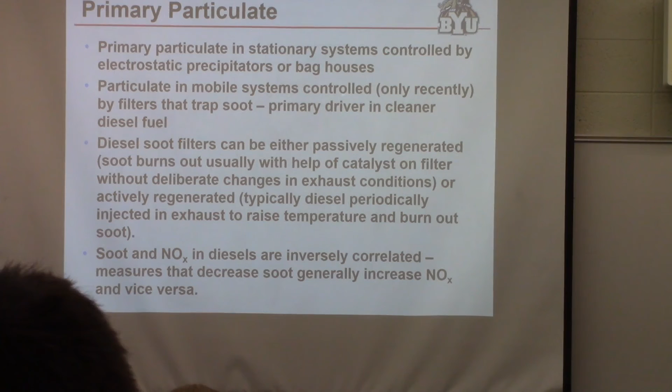So primary particulate matter - primary particles are the things that come out as particles in the gas. For example, some of the fly ash that escapes the fly ash capture systems will come out as primary particulate. The soot that comes out of diesel engines is an example of primary particulate. These small particles that come out of most combustion systems are the primary particles, but we've gotten very good at eliminating them.

Most particulate that gets into the atmosphere used to be visible as a big black plume coming out of a stack. Now you look at most stacks and see a big white plume, which is almost entirely moisture. There are still pollutants in that stack, but you can't see them because they're not visible in visible light. What you see is mostly warm water condensing into tiny droplets, and the big white billowing stacks are not pollution, they're just water.

If it is dark, then it has a bunch of particulate in it. Diesel soot is the most recent thing to be regulated, so they now have active filters in diesel engines. Since 2008 they've been required to put these filters in engines. They filter out the soot, so there's way less soot being generated by diesel.

Another form of primary particulate in the atmosphere is what they call road dust, a big component of which is your tires. You ever wondered where all the rubber that used to be on your tire went? Part of the answer is that friction tears off very tiny pieces of it, and it's floating around in the atmosphere, part of what we're all breathing. A lot of it ends up just on the road or in the ground around the roads.

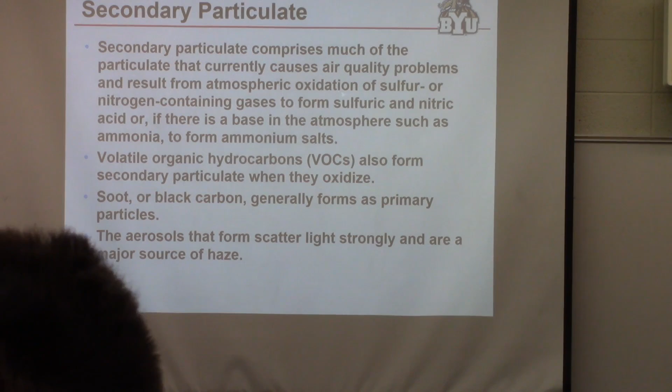So how do you control it? Anthropogenic—meaning man-caused—and natural sources both contribute to air quality issues. Some distributed sources include ammonia from bacteria, and home fireplaces are terrible—don't ever burn anything in your fireplace other than natural gas. And road dust, which is mostly primary material.

So CO2 we already talked about.